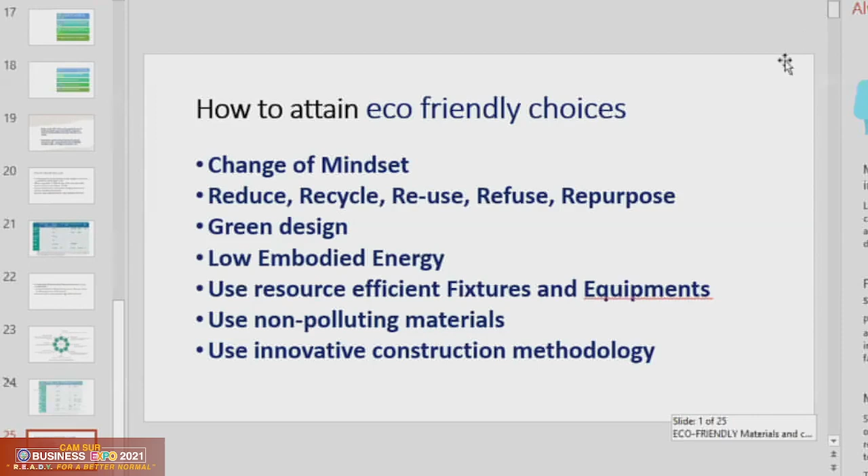First of all, actually, I should start from the start. I listened to the previous speakers, and I am very happy that everybody now is getting into the business of changing our mindsets towards more green structures. The topic that I have been provided is eco-friendly materials, and I added construction systems.

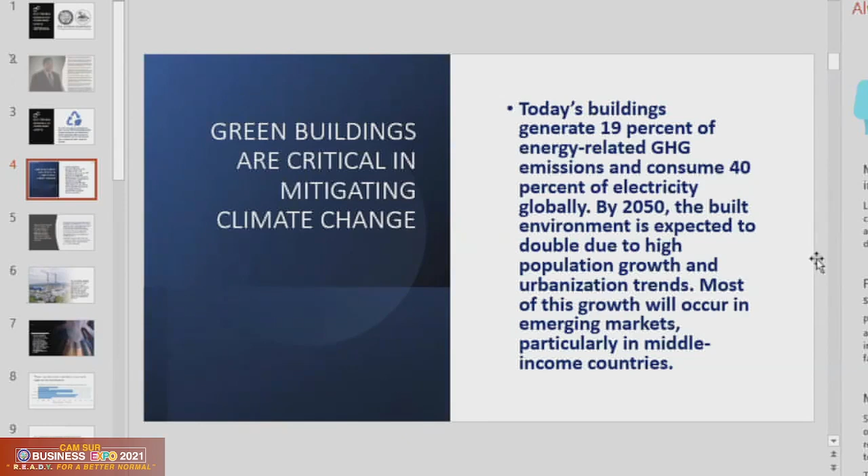The second thing I want to mention about eco-friendly materials is embodied energy. A lot of non-technical people would be unfamiliar with embodied energy, but for those practicing green design, embodied energy is the amount of energy consumed in the process from mining to production of a square meter of material. The value of embodied energy differs for different materials—for example, one type of concrete slab will have a different default value from other types of concrete slabs that might be utilized for the design.

Embodied energy is important because if we consume a lot of energy for all the materials used in all our buildings, there will be a greater demand to construct more power plants. It's actually the power plants that provide the electricity that generate most of these greenhouse gases.

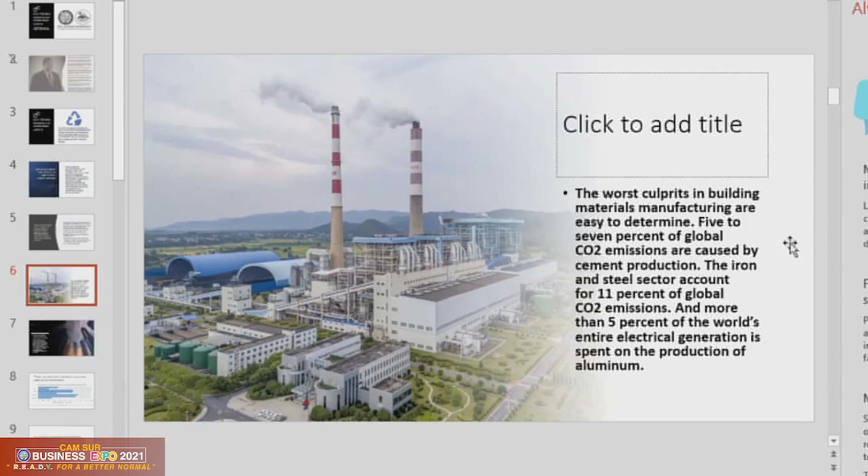These manufactured materials are primarily for construction of homes, commercial buildings, and infrastructure, and there is a big boom in construction, except that it's dampened because of this pandemic. But all over the world there is a growth of population bound to cities. For example, in China, there's a big population that moves to cities from their provinces. With the influx of more populations to urban areas and city centers, there is a need for housing and also for where they will be working, which causes a lot of infrastructure and buildings to be built.

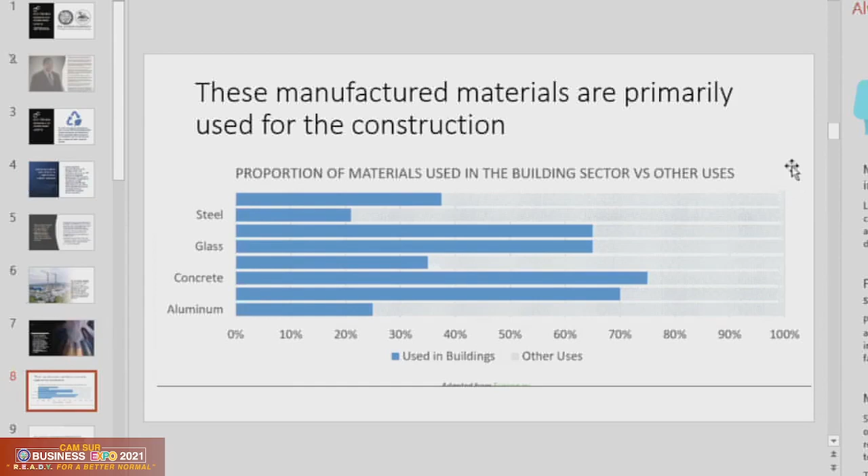As you can see, the manufactured materials used are basically steel, glass, concrete, and aluminum. There are many other materials being utilized, but concrete is the highest use, as well as aluminum, glass, and steel. So if we were to think of eco-friendly materials, we would perhaps have to focus on these materials, which make up the majority of uses in buildings.

Not only does the manufacturing of building materials significantly increase greenhouse gas emissions, but it also causes air pollution. For example, in Dhaka, the production of bricks is responsible for about 58% of the capital city's pollution—more than modern cars, power generation, and other industries combined.

So you can see that eco-friendly materials come in many forms: materials that have less embodied energy, materials that are non-polluting, materials that are less toxic to mankind and our environment. These are all eco-friendly materials.

As the previous speakers were discussing, I note, for example, bamboo. Bamboo is actually called the future of renewable material. In fact, as presented a while ago, it's already being widely used in some countries like Indonesia and Malaysia. And in fact, UAP, the United Architects of the Philippines, is trying to push for the training of tradesmen, architects, and designers to better understand the material.

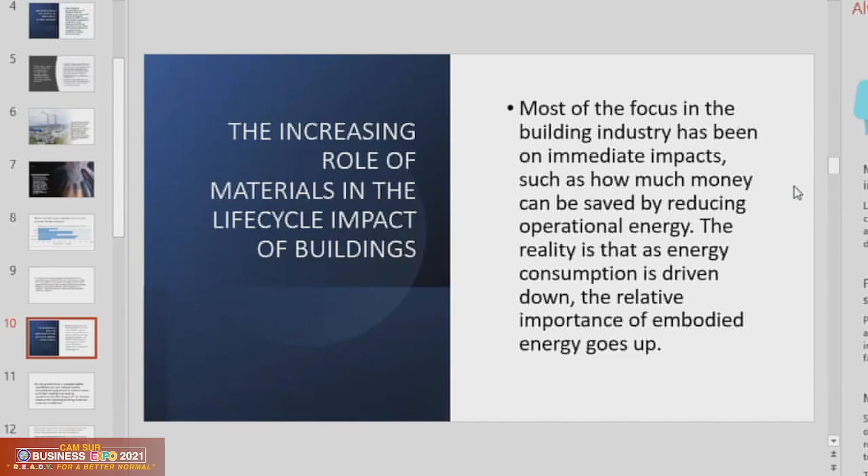As a global trend, there is a tightening of regulations on the operational energy consumption of buildings. In fact, our national Green Building Code tells us to reduce certain conditions so that we will become a more positive built environment over its 40 or 50 years of operation.

You see, buildings, unlike other creations of man, they last long—not only do they last long, about 40 years to 100 years, but historical buildings have lasted 2,000 years, 1,000 years.

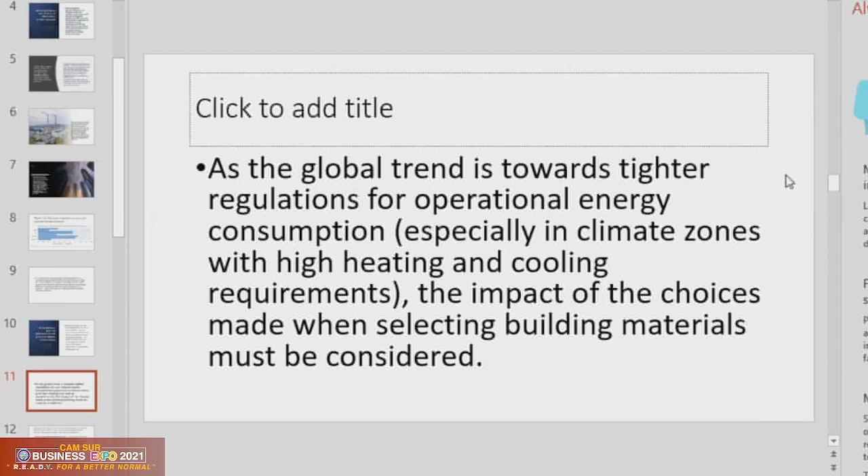But more importantly today, it's not just that a building will last long, but at the same time it will be safe, because now society and governments demand more safety for the population. So we don't only build things that last long, but also are safe. And because I'm also an environmental planner with experience in disaster risk reduction, I can tell you there are so many types of disasters. For this, I think we need materials that will be able to withstand disasters, and protect the people who utilize this built environment.

If you want to find a realistic way to reduce embodied energy, for example, of the roof and floor structure, number one, you have to reduce the quantity of material. If you produce material in this volume, there is an equivalent embodied energy. If you use lesser material, you will have a reduction in embodied energy.

I will show you a little while in another slide the various types, for example, of floor slabs. There are many kinds - what we're seeing here is just one. There are many kinds, and all of them have different embodied energy.

Another thing is if we are able to substitute high embodied energy material with lower embodied energy material, for example cement. If you use standard cement, it has a certain embodied energy, but in the process of manufacturing cement, sometimes manufacturers add pulverized fly ash or PFA, or ground granulated blast furnace slag - these are the leftovers from burning, mixed into the cement. The cement becomes what they call green cement. Why? Because that cement contains less energy to produce, since part of what went into it is actually a byproduct of another process.

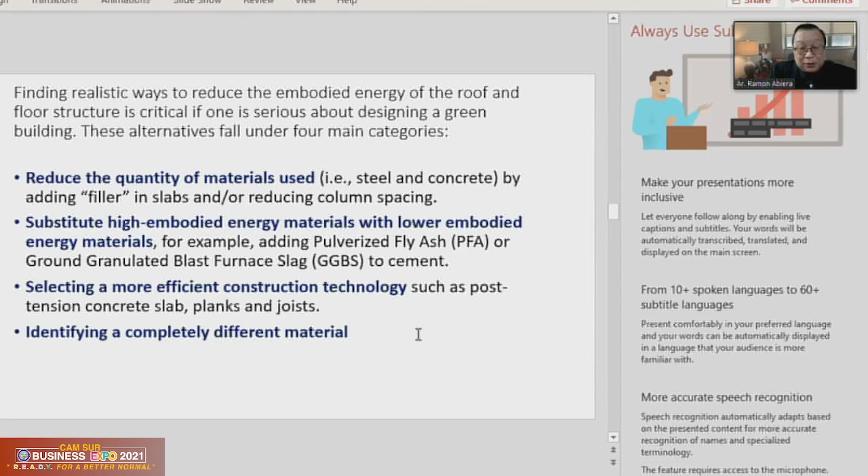And the other one is to identify completely different materials. This is where, for example, bamboo and other indigenous materials that we have are being researched upon and developed into products, to substitute manufactured materials so that they can be more eco-friendly.

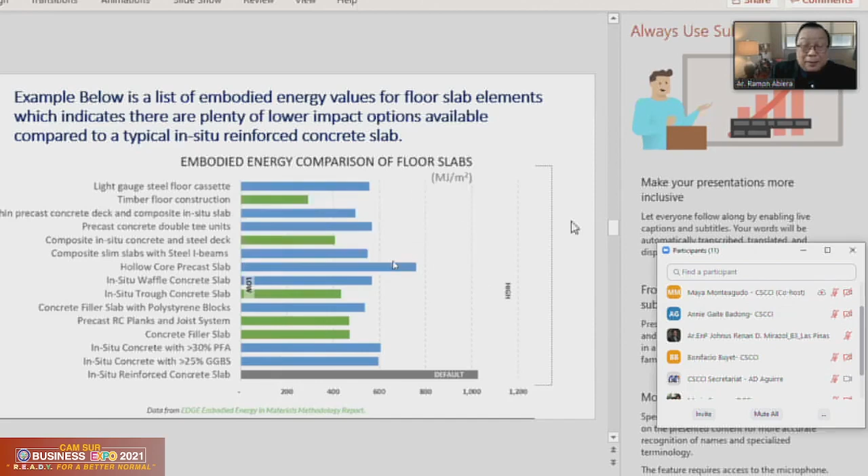So I think clients and designers must keep an open mind to be able to utilize not only the material but also how the material is designed into the structure. You can design it one way and it will have very high embodied energy, but if you utilize different configurations and design technology, then you will be able to achieve lower embodied energy.

The key is paying attention in the early design stage, because in the early design stage, there are two things that happen. Number one, they get incorporated in the design as a default. Why is that important? Well, because if it is not a default in the design, it becomes an alternative.

So sometimes the greenness or green features seemingly become more expensive when the owner understands, 'oh, you added something extra, you added green features' - forget that. So I think by putting it early in the design stage, prior to being presented to the client or owners, it becomes the default, and it makes for sensible design, and specifications are thus embodied - the greenness is thus embodied in the design and the specifications.

And the good thing about this is, if it's in the design and it is implemented, this is what's said - for the next 40 or so years, it tends to become an energy efficient design, because the greenness is thus embodied in the design itself.

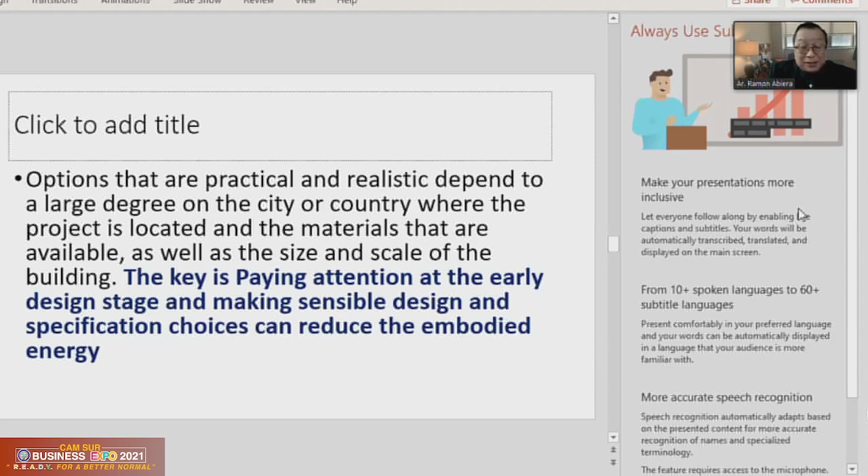So, what's this - building the amount of construction materials. Another thing that we should consider is the value chain. The value chain is also important because we have to understand, for example, one example is steel.

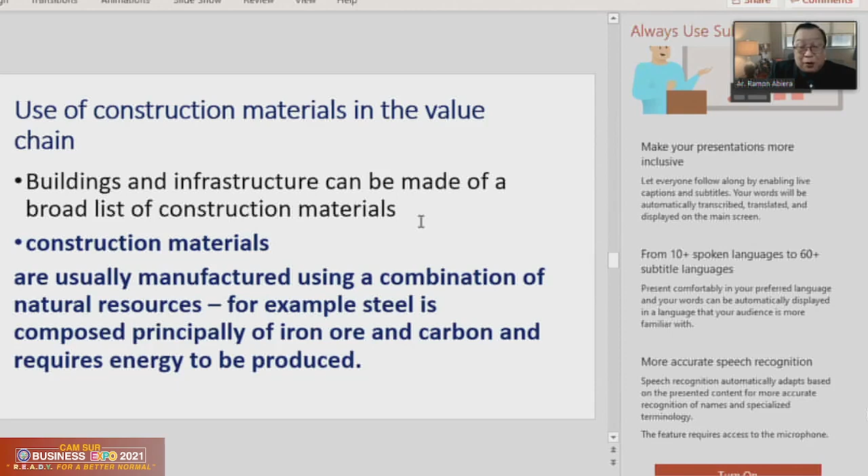It's actually principally composed of iron ore, carbon, and requires substantial energy to be produced. For example, concrete - concrete is a product used for buildings, mostly of aggregates, including gravel and sand. So concrete does not only utilize energy, it also utilizes a lot of gravel and sand, and also cement and water. And these are all resources.

And resources are not infinite. So sooner or later, we will run out of sand if we continuously use too much of it, and gravel also. That's why sometimes they tend to use crushed gravel rather than natural gravel, because gravel is becoming harder to find.

And this is one of the greatest contributors to the use of sand and gravel by sector.

So if we all understand what materials are components of certain building materials, then we get to understand how to save on all of this and how it impacts our environment.

Correctly, today, the first speaker, architect Johnus, actually mentioned about the wise use of these materials, because all of these are God-given, and because of our natural resources that were God-given to us, we have to make wise use of it, and use it according to our needs, not according to our greed.

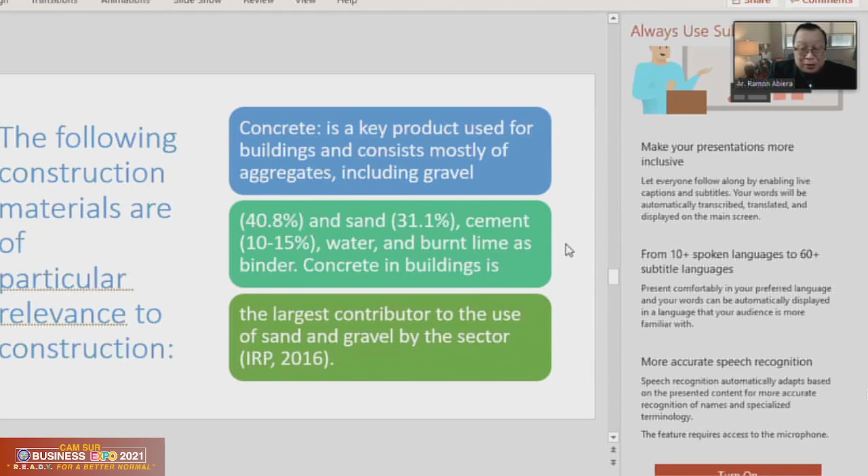Okay, cement, sand. Okay, I said this already.

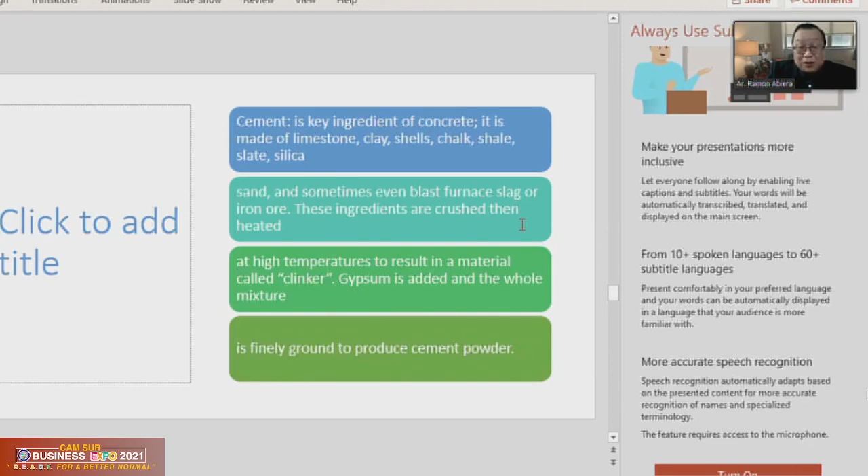The other components of cement, for example, are made of limestone, clay, shells, chalk, shale, slate, silica, sand, and sometimes even blast furnace slag, the one I mentioned a while ago, and or iron ore. These ingredients are crushed and heated to a high temperature, and they become clinker. The gypsum is added, and the whole mixture is finely ground to produce cement powder.

So another one that has a lot of use in our infrastructure is asphalt. The main ingredient of asphalt used for construction, transport infrastructure, mostly roads, is composed of petroleum byproduct and aggregate.

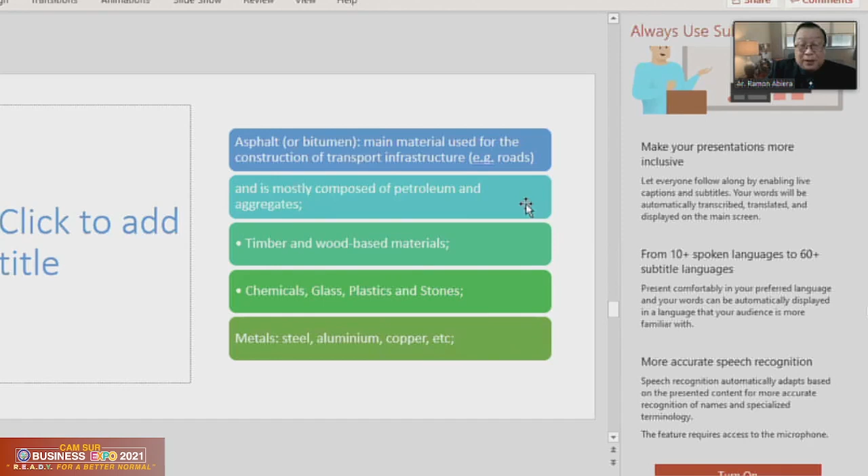And there's a lot of other materials that are being utilized in construction. You know that there are about 30% of our world population living in rammed earth construction, and at the moment it is regaining interest even in industrialized countries. Rammed earth is just compacted earth, and I am surprised that about 30% of the world population still, to this day, live in rammed earth construction.

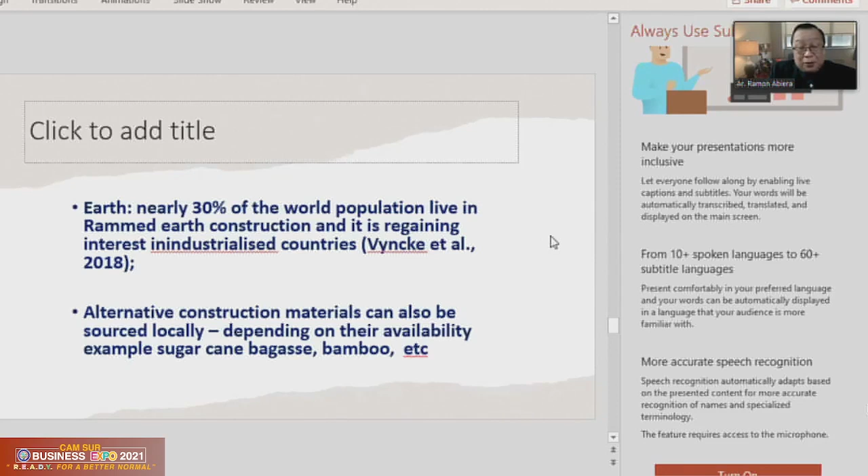Okay, as I mentioned, other alternative construction materials can also be locally sourced depending on their availability and application to construction as a construction material. We have sugar cane bagasse, bamboo, and all the other fibers, abaca, jute, are now being studied for its applicable applications to construction.

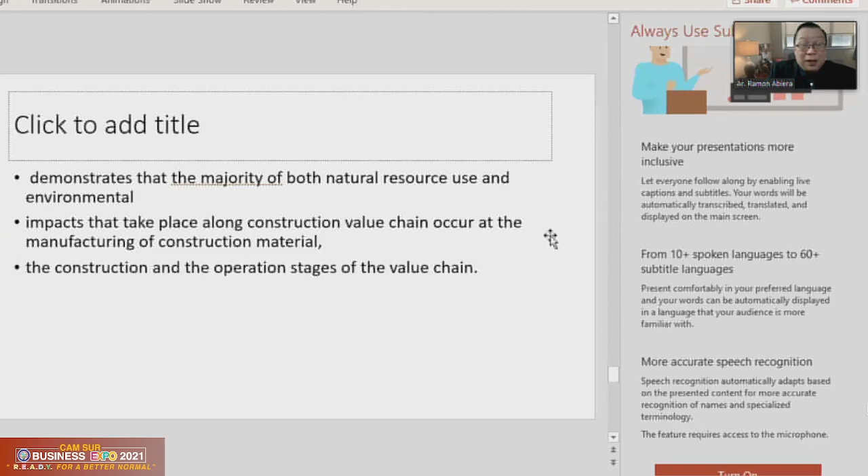So I go to the most important thing to make certain economic choices, eco-friendly choices. Number one, the cheapest is actually the change of mindset.

This is the change of mindset of the client, of the designers, of the contractors, and everybody in the whole construction industry. You see, mindset is very cheap. You don't have to pay for it. Unfortunately, it's not something that can be gifted to you. It's not something that you can buy. It's not something that your mother can give you as an inheritance. But it's something that you have to embrace. The only way you can get a change of mindset is you have to personally embrace it.

So, at this time in our global pandemic and also our climate change, we, the people of this planet, need to change our mindset. We have to change a mindset that we need to develop, use, and build our built environment according to green standards in order for our environment to be sustainable and for us to develop more resiliency to the various disasters that come our way. We cannot do anything about these natural disasters. They come on their own. However, we can reduce, we can mitigate the effects on us and our built environment.

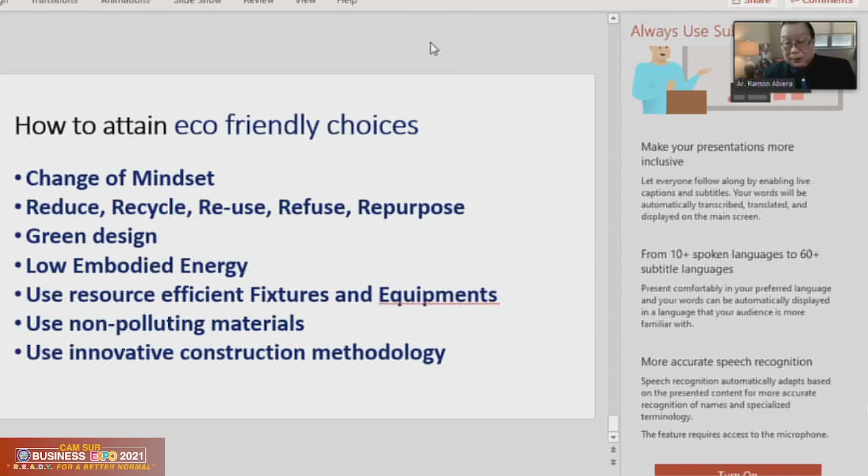The other eco-friendly materials are actually part of strategies being utilized by green practitioners, green designers. One of them is energy saving light bulbs, which reduce our energy consumption. So you can consider them as eco-friendly materials.

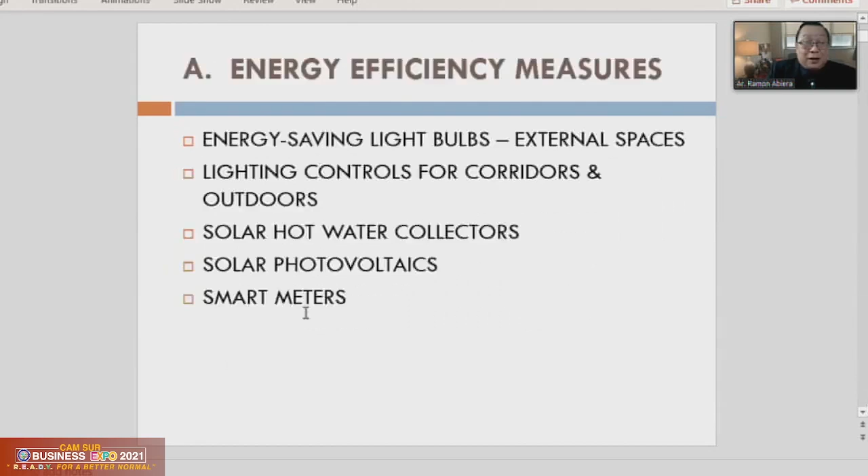Lighting controls for corridors and outdoor spaces - this is where you can actually reduce energy use in areas where there are no people. We have solar hot water collectors, solar photovoltaic, smart meters, all of which, and also of course natural ventilation, would save energy.

So by having adequate natural ventilation for our projects, it would definitely be a good choice. We can also see in habitable homes that people in those rooms would have the choice to use ceiling fans instead of air conditioning. If you use air conditioning systems, you have to have a COP of 3.5 or better.

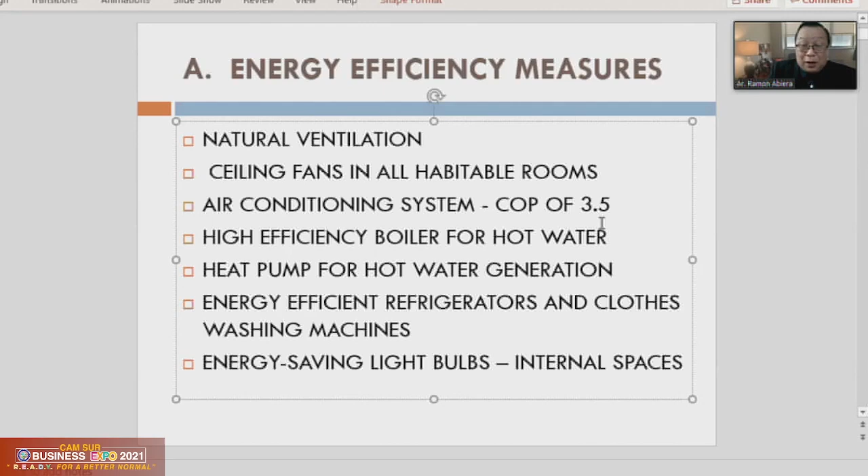You use, as already mentioned a while ago, high efficiency boilers, heat pumps, light bulbs. The other thing is even the color of our structure and the roof has a big impact on our energy consumption.

For example, if your color is gray, you have a heat index of about 20%. And if you have white, you have 69% reflectance. So even the color has something to do with our energy consumption inside the building.

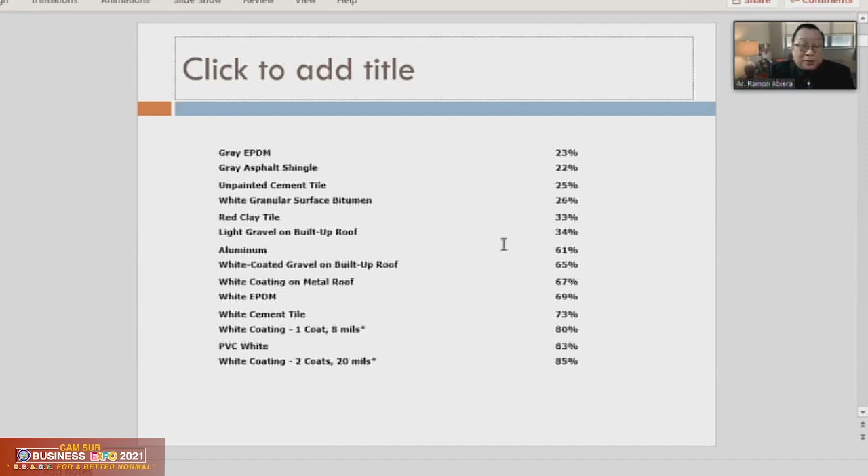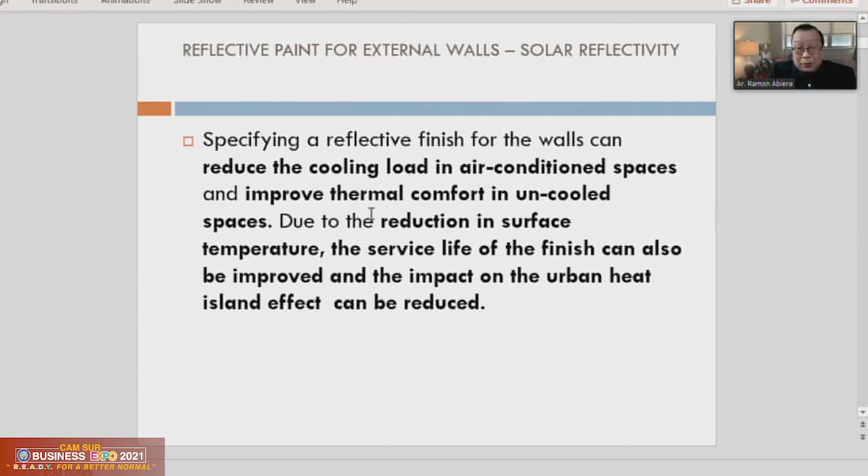So that's something that you have to discuss with your designers and green consultants. A reflective finish for walls can reduce the cooling load in air-conditioned spaces and improve thermal comfort in uncooled spaces - two benefits: it reduces cooling load in air-conditioned spaces, and for uncooled spaces, it improves thermal comfort for the users.

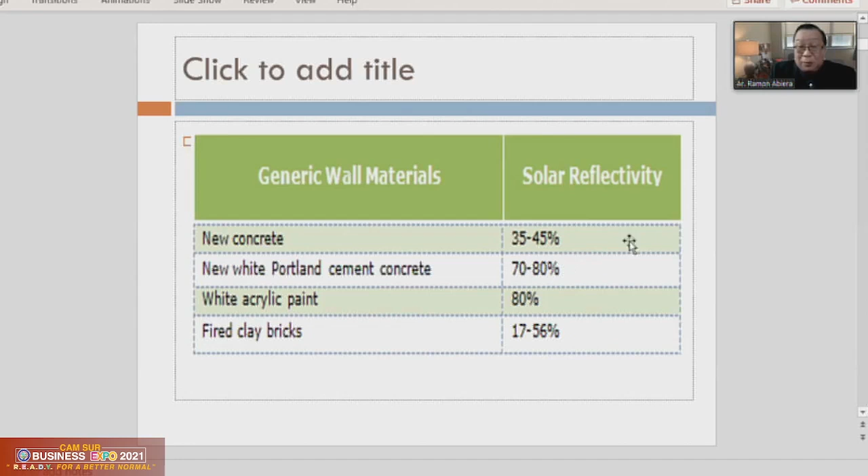So even for example, just the color of concrete - new concrete has 35 to 45 solar reflectivity. Fired bricks have 17 to 56. So if you paint your concrete white, you have a higher reflectivity. And if you have a solar reflectivity that is higher, most of the heat will be bounced off your building.

External providing shadings, these are all choices. Now I will go to the use of insulation. So insulation is actually an eco-friendly material. Now, what type of insulation do you use? But insulation in general is an eco-friendly material because it improves the building envelope and makes cooling the building use less energy.

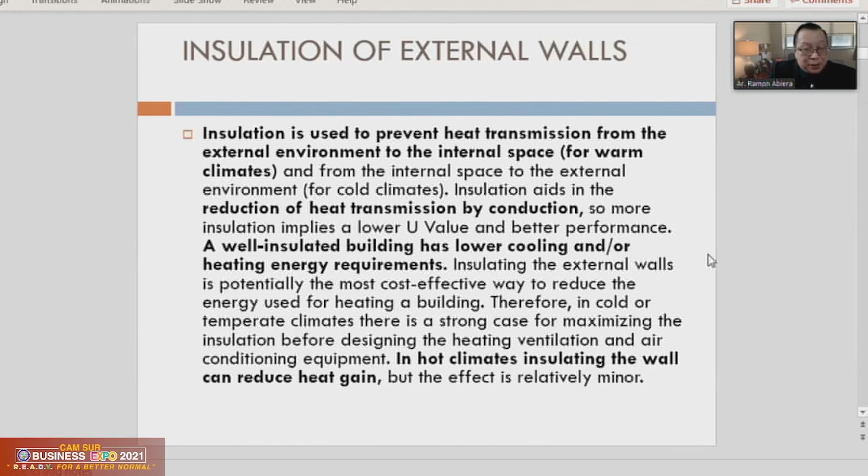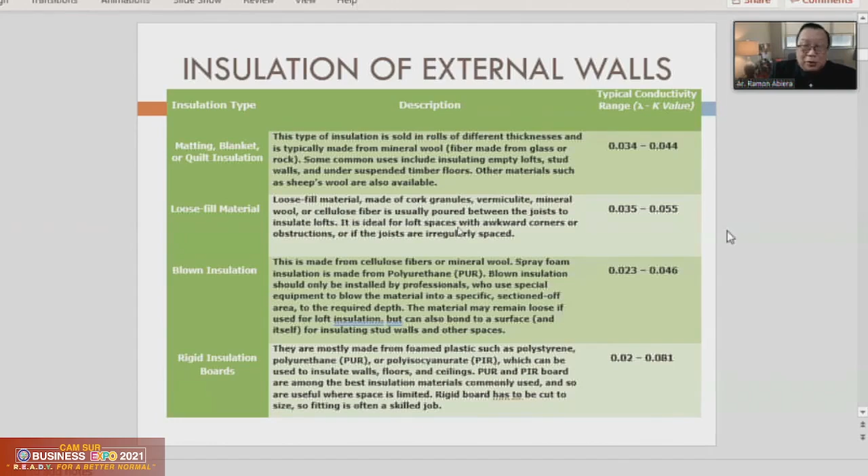Different types of insulation have different types of conductivity, so this is something you have to discuss with your designers. But insulation in general is an eco-friendly material, as they say, it's all about preserving the building envelope and providing sufficient insulation to prevent heat from coming into the building and to prevent cold air going out from inside the building.

So types include vacuum insulated panels - these are strategies or different types of systems you can use. You have phenolic foams, expanded polystyrene, wool, but even a vacuum air gap provides insulation.

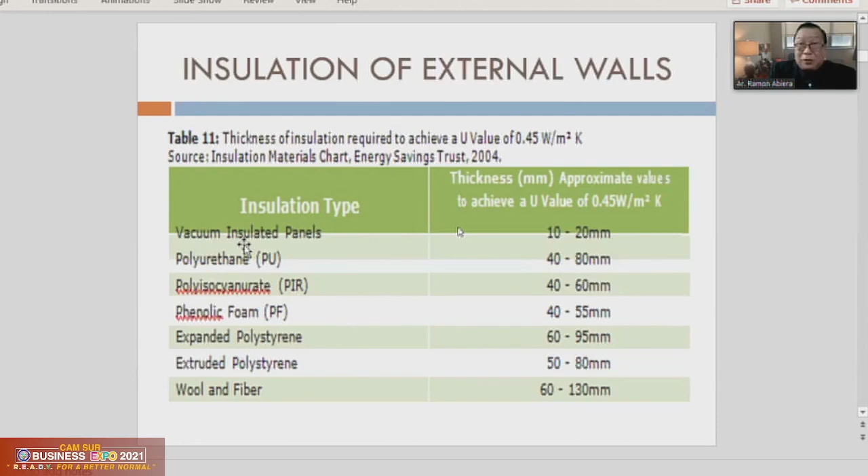Also glass - low E glass is an eco-friendly material because although it's more expensive, it definitely helps in preventing heat and coldness from escaping and heat from entering. That's why there's another strategy where you have to reduce the window to wall ratio in order to reduce the ability of heat from outside coming into the cold space.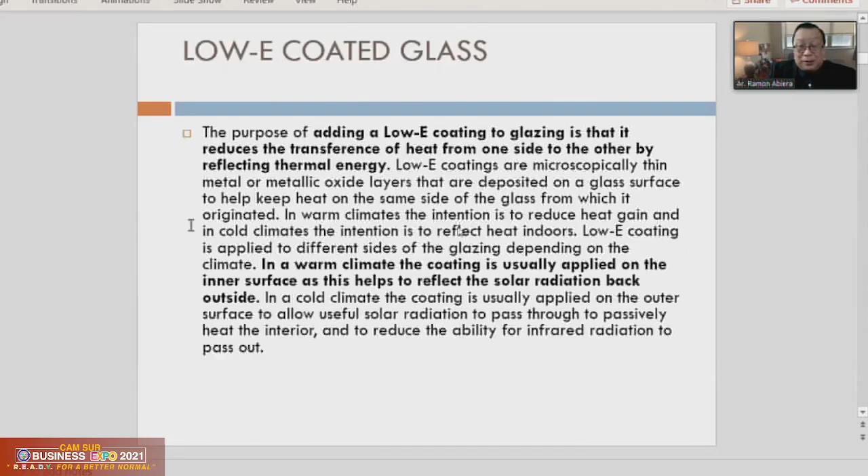Also, there's high performance glass - double pane, and now they want triple pane. The reason is they try to make sure, especially in cold countries, that the heat inside the building will not escape to the cold ambient air outside in those very cold countries.

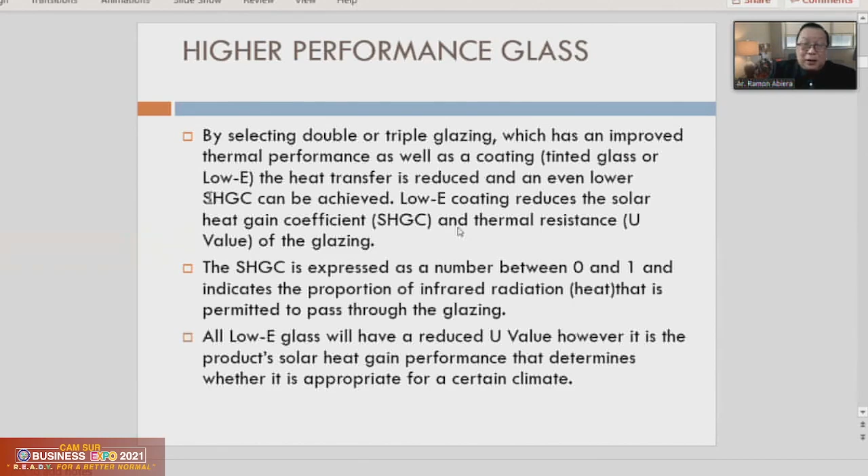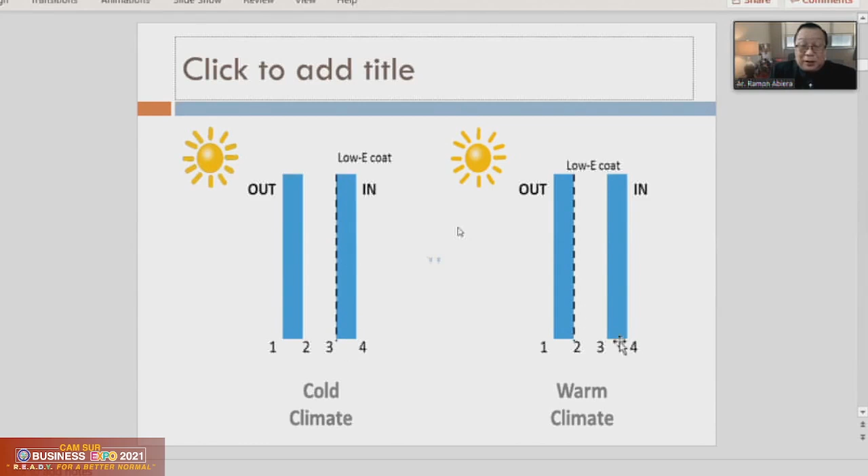Okay, this is an example of how a high performance glass can actually prevent heat from the sun radiating into the building. There are many types of systems being employed. This one is in cold climate, this is a film sprayed onto the glass. In warm climate you put it here.

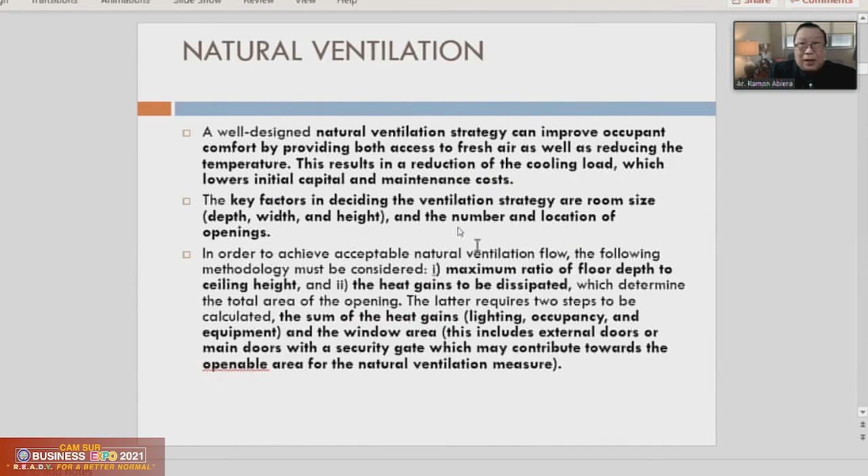So materials, even glass, concrete, steel, there is an eco-friendly material depending on how it is used and how it is implemented in our buildings. So I wanted to show you this.

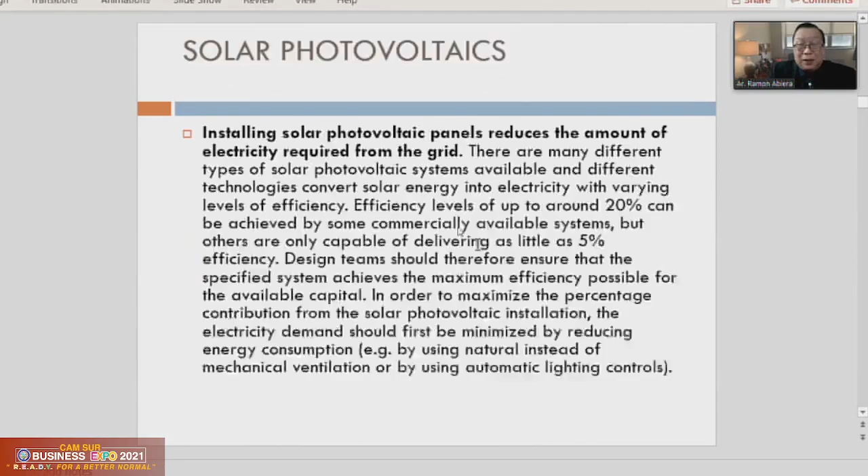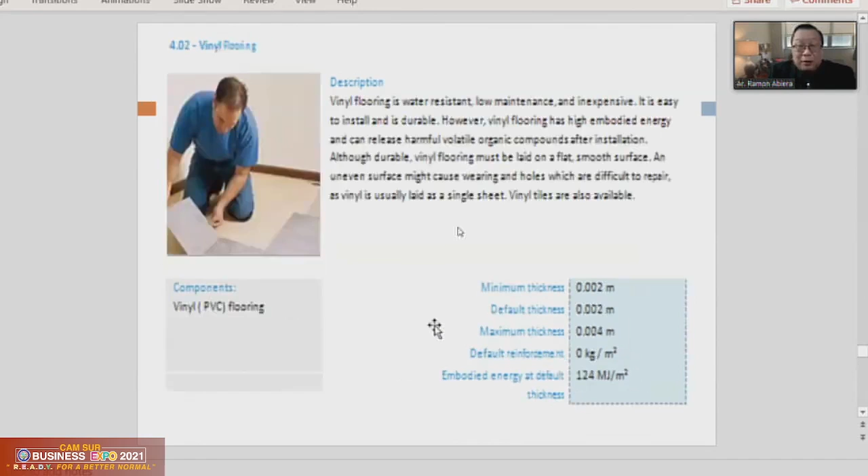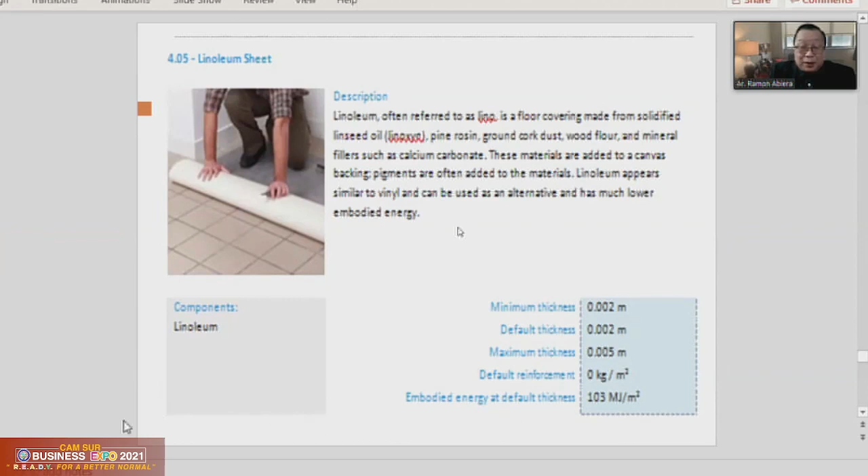For example, these are the different types of finishes. Different finishes you apply for a building have different embodied energy. Each one, you have stone, you have vinyl flooring, they all have different embodied energy measured in megajoules per square meter. So the higher the megajoules per square meter utilized, the higher the embodied energy. These various materials are resource materials that your designers need to check to determine the total embodied energy of your building.

And also there's a new concept which is net zero. Besides having very low embodied energy, the building also generates its own power, its own energy. In Japan, they have many of these. In the Philippines, we have a net zero certified building structure in Makati.

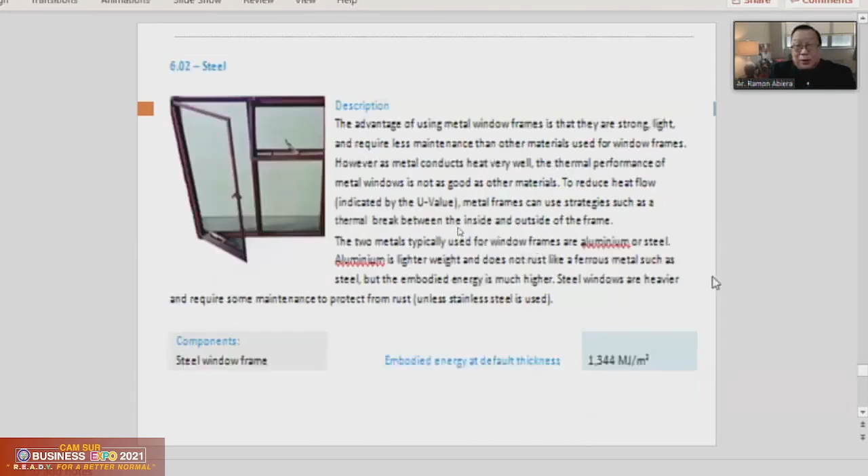So I will go to the next one. I'm just looking at the watch. I need to share here. I need to bring this up there. Share, share here.

Okay, so now we go to a type of construction methodology that is cheaper. If you go to the States, you will see many projects, especially in California, where there is a lot of earthquake activity. If I stayed in the States for almost 8 years, sometimes what happens is you pass by an area and the buildings are constructed after just a month or so - you see the structures already standing, it's so fast.

So one of the reasons why these buildings are executed quickly is because of tilt-up construction methodology. Tilt-up construction is almost similar to precast. The difference between precast and this one is in precast, it is done in a factory and then afterward it is hauled to the site.

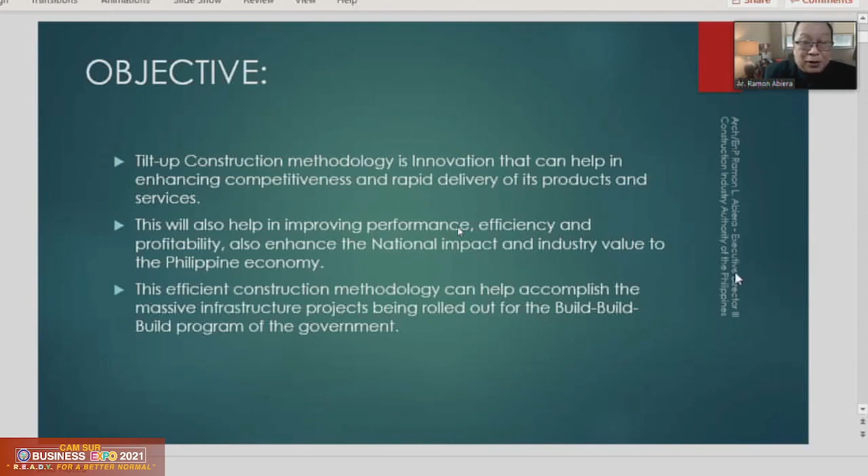The difference is in tilt-up construction, the casting is done right on the site. I will show you here - they are cast on the site. These panels are cast right on the slab of the project. What happens is you achieve a lot of savings. One of the savings is you do not use formwork.

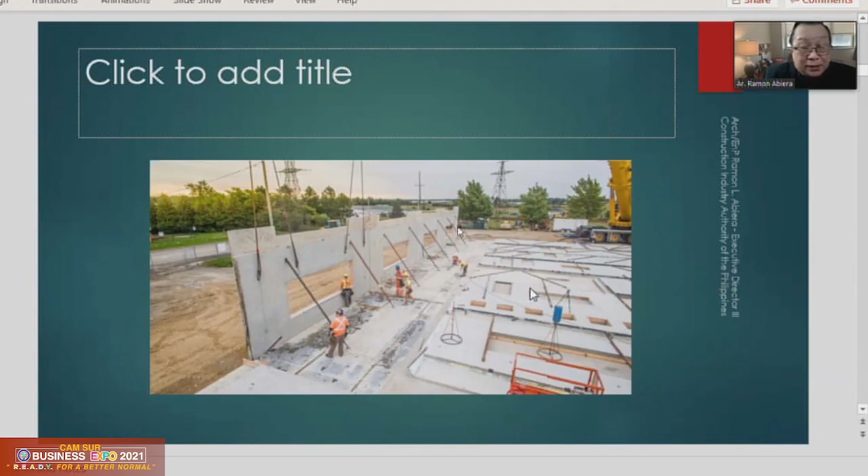Formwork costs money in construction. The other thing is if people were working vertically, they tend to work slower and the safety issue becomes higher. But if they were working on the ground, they don't use scaffolding, so their ability to work is faster because they are not in danger of falling. They work faster, there's little wastage, safety is increased, and delivery of the entire project is quicker.

The other good thing about tilt-up panels is that the ones being delivered by transport are limited by the amount of transportation equipment available. So if you have very large sections, you cannot transport them, or maybe you have odd shape sections that you cannot transport through our streets. But in tilt-up construction, that can be done right on the slab and lifted here - there's no transportation cost.

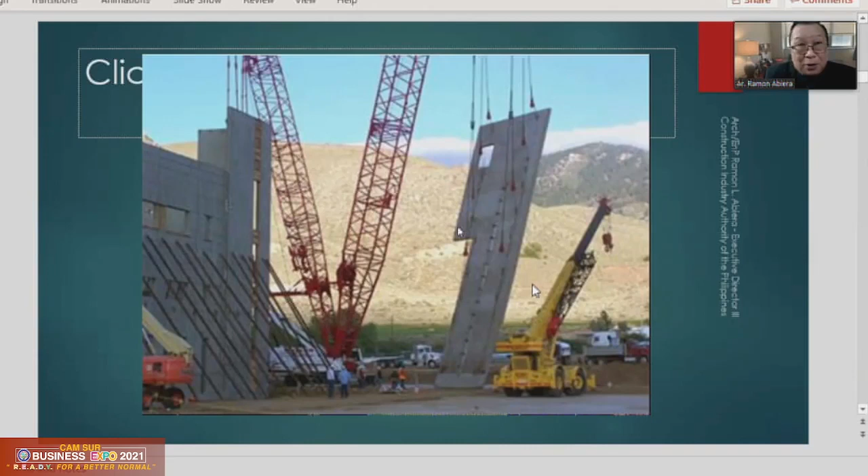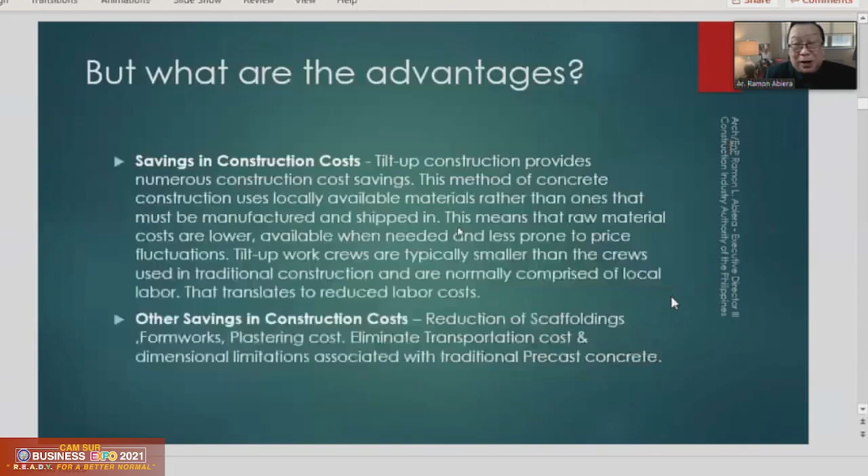Walang shoring cost, and also the framing is faster and people work faster. I researched this, and the outcome I wanted to show you, because sometimes people think tilt-up construction only comes out like a bodega type, or it's ugly, there's no beauty. Well, actually, I took some examples, and they look beautiful, really. And even the finishes, they can have a finish already built into it.

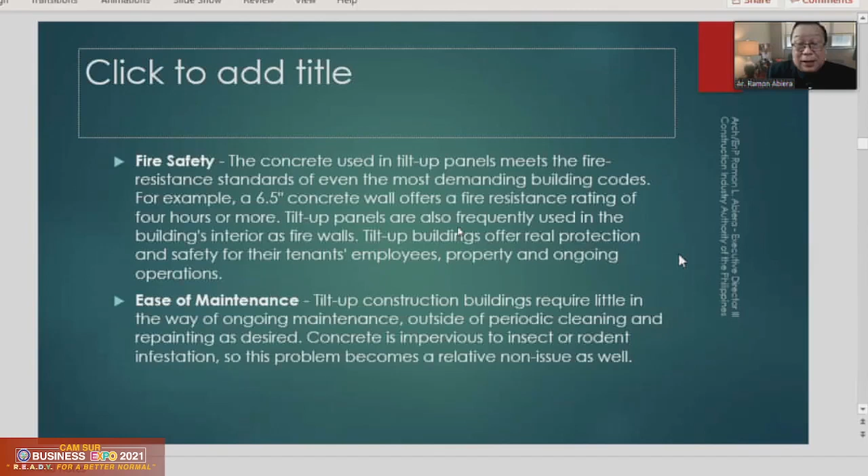These are all designed. It's also good for fire safety. It's completely fireproof, because they are made of thick panels. It's very easy maintenance, for repairs and expandability. You can actually remove the panels when you want to renovate and reuse them in another area. So this is something that is possible, unlike with other types.

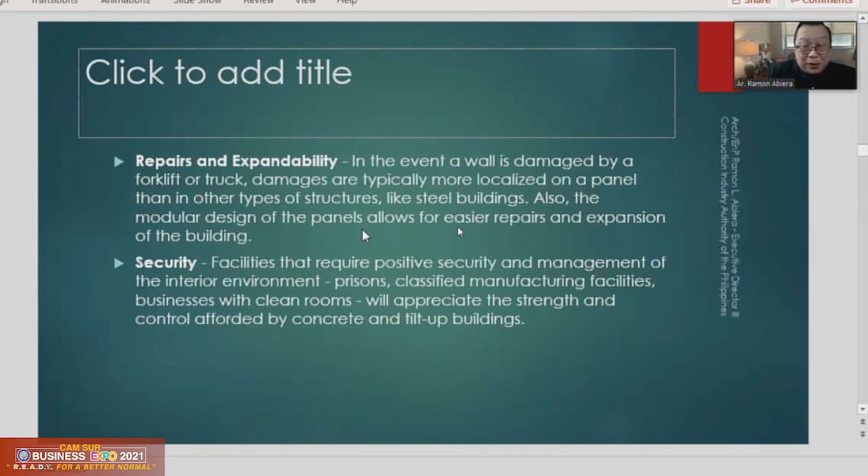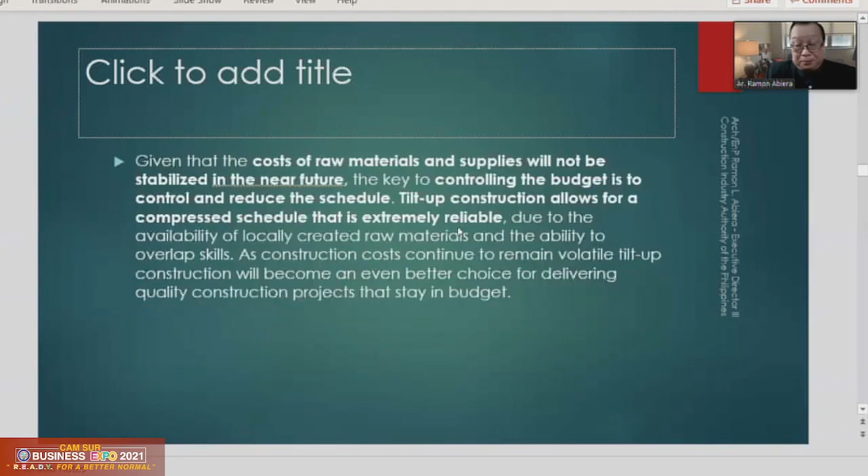And security-wise, they are stronger. So with this, I'd like to say... let me turn off this. Okay.

With this, I'd like to mention that in our eco-friendly materials, we need to expand a little bit. That includes not only eco-materials, but also a change of mindset, good green designs. We also have to use non-toxic and non-polluting materials. We have to use materials with low embodied energy, materials that are locally available, that are innovative, resilient and sustainable. So the word eco-friendly materials should be expanded to incorporate all these other things.

Maraming salamat po. I'd like to thank once again the CamSur event for inviting me and for having a wonderful topic regarding green. I am an advocate, and I am very happy that the other speakers and the CamSur event invited and had these topics. Maraming salamat po. Thank you very much.